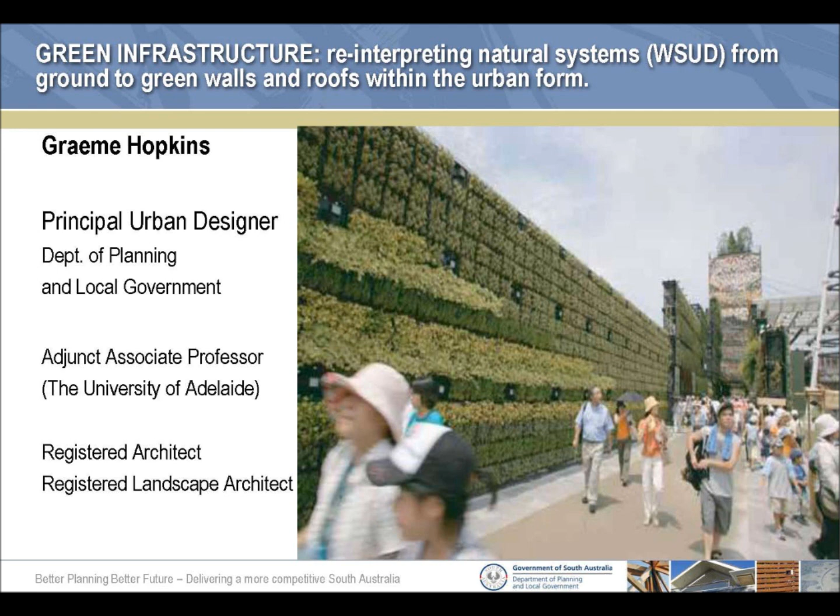I'll be looking at some of the natural systems, not all of them, and briefly talking about some of the things we're doing at planning, which is quite interesting work, and how we can build up density in the city and maintain our open space.

First of all, a city is an ecosystem. I'm not a scientist, so I have a very simple definition: an ecosystem is a community of living things interacting with non-living things. I understand that, and I think that's a really simple way to look at it.

These systems are considered open systems, as both energy and matter are transferred in and out, resulting in change and evolution over time. That last phrase is really important nowadays, as our ecosystems and weather patterns are changing. Normally this has happened over a long period of time, but now it's speeding up, and we have to get in and work with that quickly.

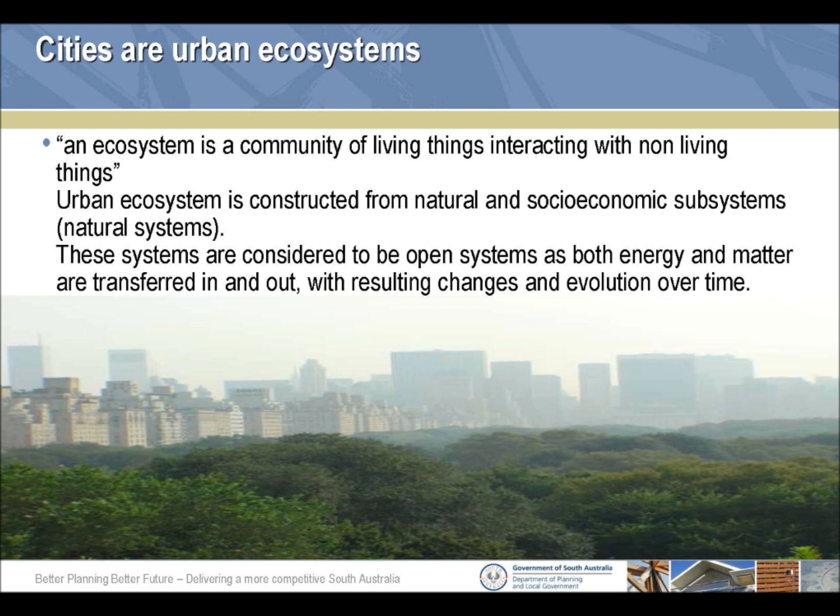So that's one premise. I work on two premises: a city is an ecosystem, and the other is that a city is a water catchment storage area.

What I'm saying is, if you look at a natural system, you get about 20% runoff of water, or 20% base load of water from the ground, and 27% runoff, like Kangaroo Creek Dam, so you get about 40% of the rain caught in that dam, if they're not topping it up from the River Murray.

But in a built environment, when you look at the city, your base flow is only 5% because there's very little infiltration, but your surface runoff is 58%. When you put those figures together, the city makes a lot more sense—you've got 63% catchment compared to 47%.

So if we're using these hard surfaces, water runs off—you don't lose it. But the trick is how do we store the water within the city so we can reuse it? There are things like roofs, vertical walls, storing water in the road pavement, so we can recover that. So those are the two premises I'm working on.

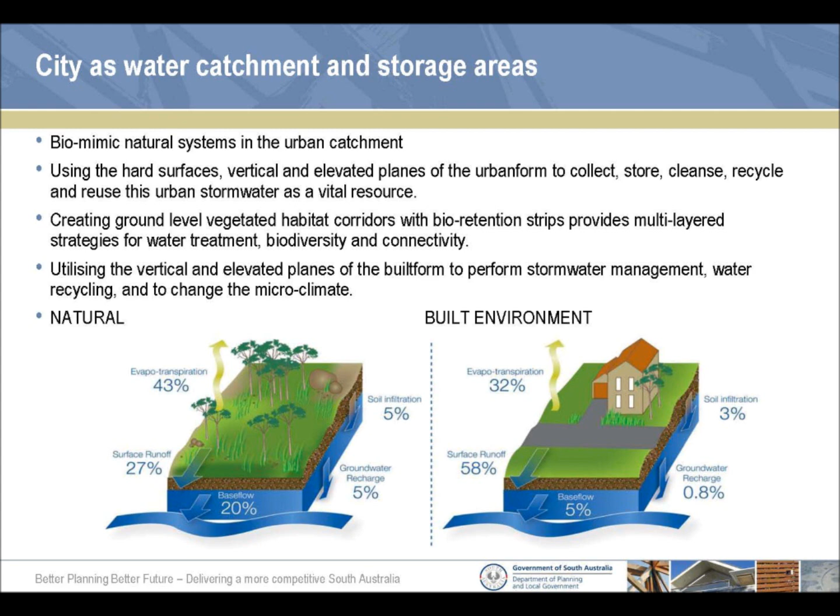This falls into what I call green infrastructure, a common term happening around the world now, and I'm introducing this to government, which is an interesting process in itself. Green infrastructure, as I see it, is using natural systems in the urban environment to replace existing infrastructure, such as here's an example looking at water.

Our cities can't replace the infrastructure—it's too expensive. So we need to find ways of doing that naturally, and at the same time enhancing the built environment around us. We can augment this, and it can be a great cost benefit to the state or the city.

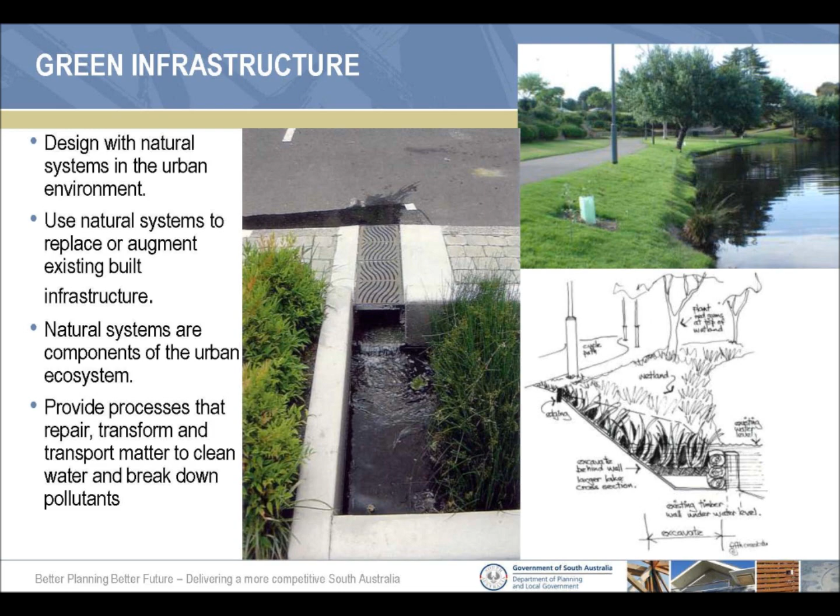The rainfall in Adelaide is going to be quite different to the way it is now—we're starting to get the effects. We're going to have about the same amount of rainfall, give or take whatever scientists you believe, but the way the rain comes is going to be in bigger, more intense amounts.

In the top diagram, the blue water is the rainfall and runoff we normally get on our paved areas. What's going to happen is we'll get that rainfall in bigger loads, so the purple on top becomes the water volume—those pavements are catching a lot more water.

If we don't improve the infrastructure to take that water away, we'll have nuisance flooding. So there are real issues in the built environment. Things like Rundle Mall will get a lot more water on its surface, and the infrastructure there won't cope. We'll get wet feet walking down there, and in an extreme case it might go into the shops.

So what we're looking at is the bottom diagram, where we reduce the catchment—the paving area. With that intense rainfall, we have a smaller, more like current runoff, but we put it into the ground, into biofiltration strips. We let the water clean through these systems and soak in, more like the photographs from work that Taylor Cullity did in Melbourne—that style.

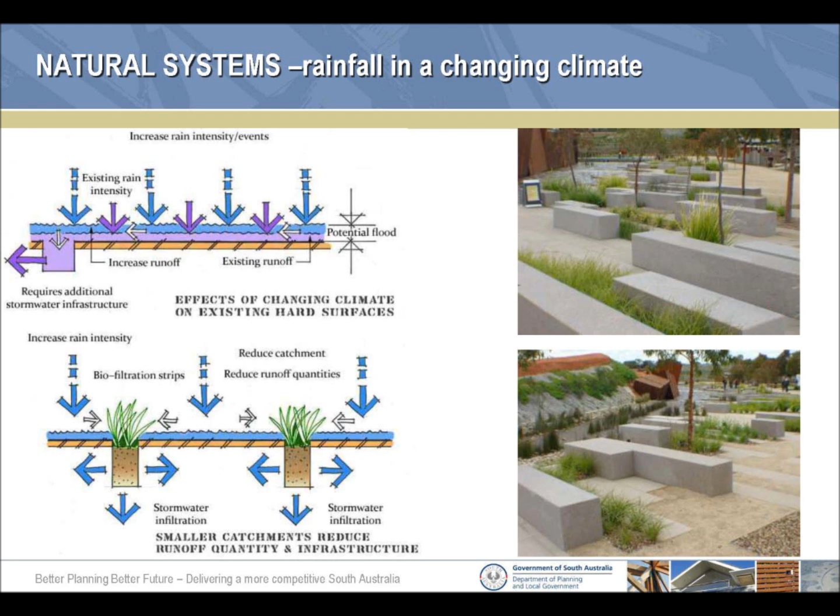So that's sort of looking at rain. Other things we're looking at is how you use trees. Trees are a natural system. They're a heat pump. There's air circulation around a tree within its canopy from its transpiration. There's water, different humidity levels and air pressure. So you get a natural circulation.

This is some work being done, was in America, was for Dubai. Whether it's been built now with the financial crisis, it might be another story, where they're building giant artificial trees, where you actually bring in the hot air. The hot air might be up there 40 degrees. You actually spray mist water, which then reduces the air temperature. You get a change in air pressure, and you can bring the cold air down through a downdraft chimney effect to bring a temperature back into the mid-20s at the ground.

Singapore are looking at this in their new parkland developments on their waterfront, and they're looking at these artificial trees that are 7 stories high. Taking that sort of, again, that's a really old technique. If you remember back, people of my vintage, of the old Parliament House in Canberra, there was the Senate and House of Representatives courtyards. They had major trees in the middle, and they were designed to pump out the hot air. And if you look at the Treasury building, it did have big scale trees to do it. It's a very old technique.

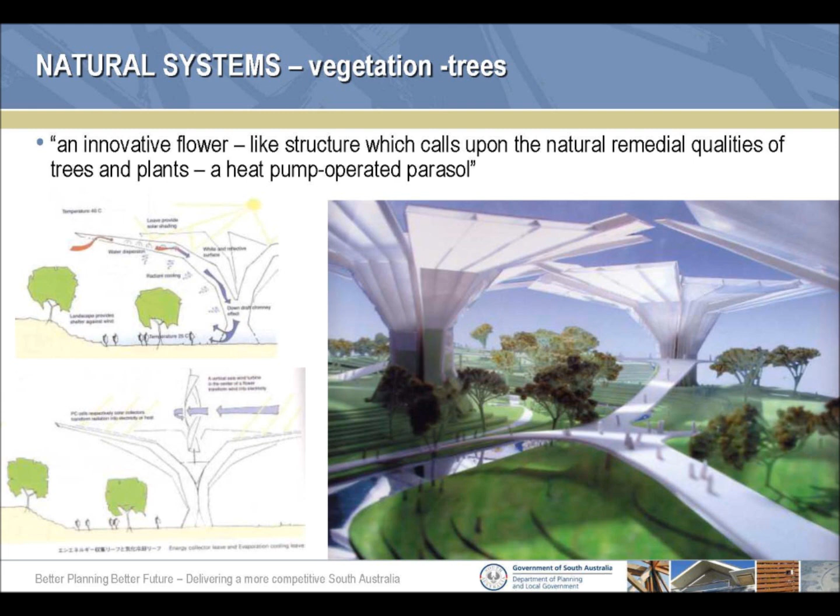Taking that principle, we can look at places like Rundle Mall and outside malls. They're going to become really less populated as the temperatures rise, as people worry about skin cancer. People are going to move to the internal malls, which have other social problems because they're private land and they can exclude different population groups or whatever. And because they're going to be air conditioned and comfortable.

But if you look at the mall, take that shade structure there, I quickly just did in principle what you could do. You can collect the water on the roof, take it down, store it under the paving there, put solar panels, stick onto the glass. That will pump the water back up, mist it out, and then you start to get your air temperature changes and use the downdraft chimney effect to bring cold air and air condition these malls. Therefore, if you had a series of these, the actual temperature would be reduced, you could attract people back, and there's an economic advantage then back to those businesses.

So we've got to look at how we handle the public realm, and it's going to be quite different to how we're doing it now.

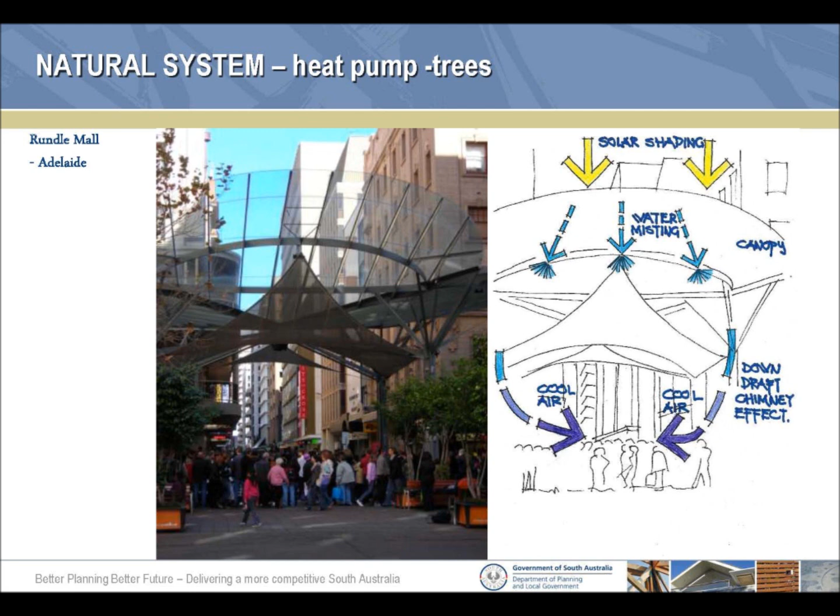And if you take these natural systems and you actually integrate these natural systems, they will then start integrating with each other. You can actually treat pollutants and stormwater runoffs and so on.

This is a very quick conceptual sketch of a project we're working on at the University of South Australia. We've just got some grant monies to start the preliminary design work where we're looking at treating water, storing it under the road pavement within the airspace of the gravels, using street trees for shade effect, reducing the heat island effect off the pavement, using cool pavements, and then recirculating that water back into the buildings, into new buildings as reuse water.

We also start looking at using green walls and green roofs. Green roofs are extremely important for stormwater retention and so on, and green walls are very similar, but we can use those green walls to cool the sun on the walls surrounding this laneway.

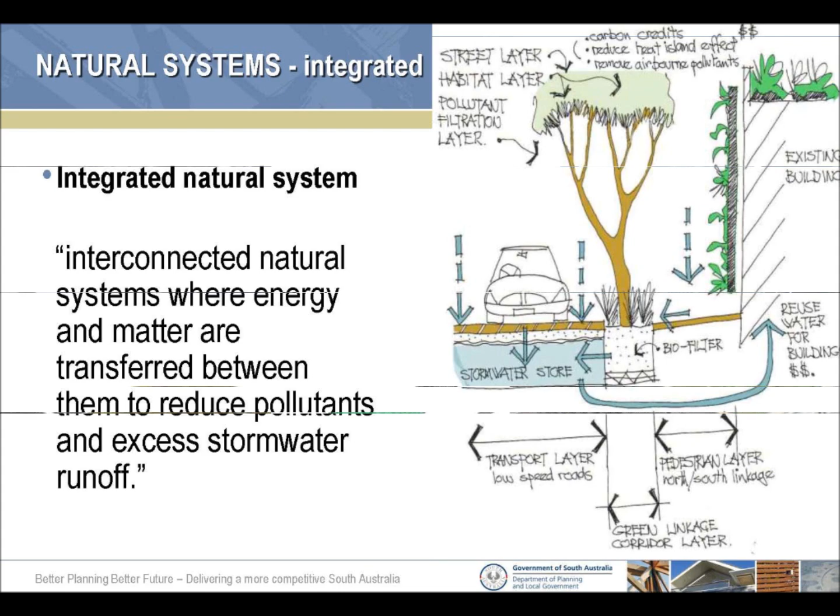And that brings me to where my interests are even more developed, is looking at green roofs and walls. Green roofs, you can use them as urban forms. You can do any shape you like, anything nowadays, because the technology's there. These dome roofs are the California Academy of Sciences, where they've actually used the actual topography to cool air and bring that down into the building to air condition the building. So there's lots of benefits.

We can increase shade and insulation, reduce energy costs, and in multi-storey buildings we only have to reduce the amount of energy by a minute amount to get major cost savings.

As Stefan said, the sides of a tower are exposed, but on a tower like the Chicago City Hall, you just shade the top, and that has an effect for only the first few floors. So to me, we really need to look at the walls to have greater benefits.

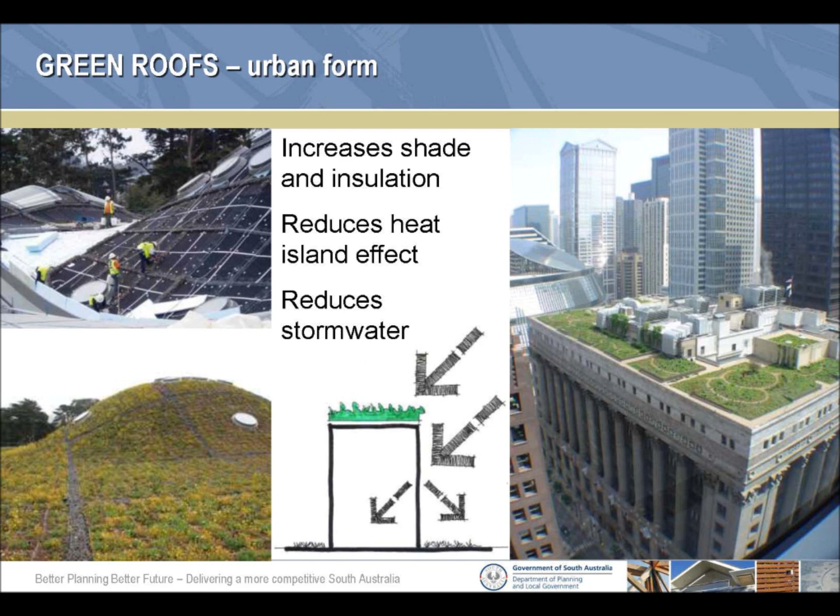But just looking at natural systems, we can use on rooftops the natural cooling effect of plants to cool the ambient temperature around photovoltaic cells. They can actually work up to 20% more efficient than on a conventional roof. This was a 5-year study by German scientists who have done this work. If we can get 20% efficiency in a new photovoltaic cell, the commercial world would take that up and say this is a great benefit. We can do this with a green roof, and we have lots of other benefits.

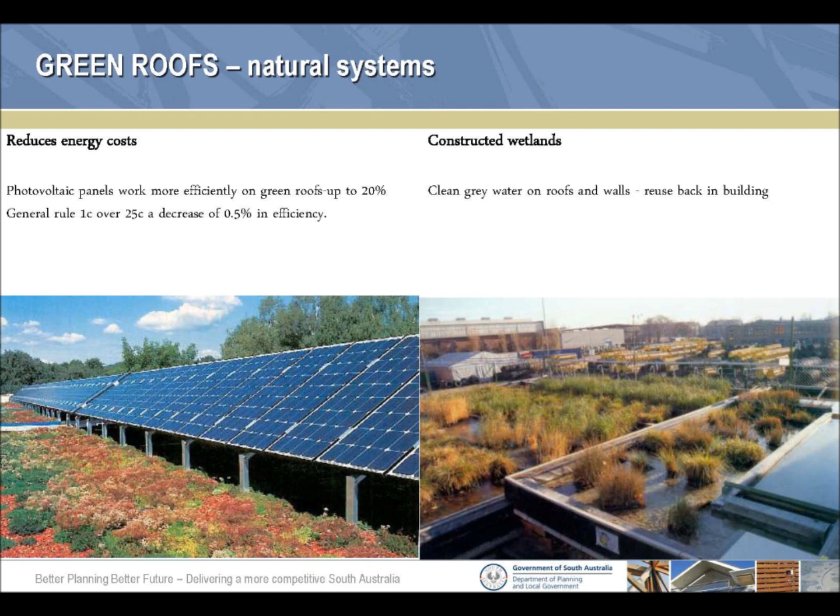We can actually put constructed wetlands up on roofs, and this example here is a John Deere factory in Germany, where they take the water out of the production line, bring it up to the roof, cool it, treat it, and then reuse it back into the production line. So the technology's there. We can have a lot of our wetlands on top of building roofs instead of taking up ground space, which can be used for other functions. In a compact city, ground space is critical. If we can use the building fabric to do the same jobs, then that's what we're doing.

If we look at living walls, they give us urban texture to the streetscape and the form. But I think they have a big benefit to the energy use of the building, because if it's a multi-storey building, you've got a lot more surface area you can treat. Technically, it's a bit more difficult, but not impossible, and with the new systems being developed, the cost is coming down. They've got similar benefits, reducing the heat island effect, and so on.

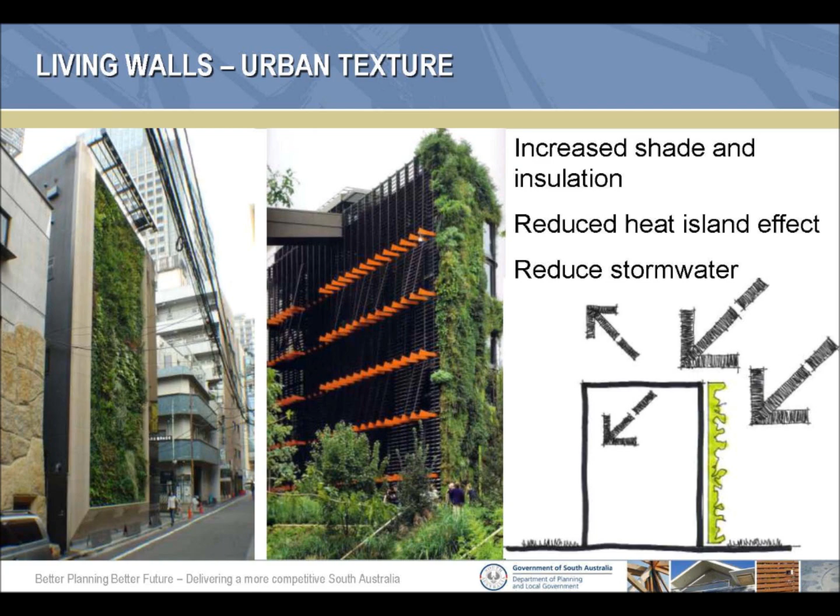But if you look at the living walls as natural systems, you can actually look at a multi-storey building - that's a section here on the right - where you can use the living wall as a biofiltration system. You can take the grey water out of that floor, run it through the system, and then bring reuse clean water back into the next floor and so on. So you get this cascade effect happening right down the building. This technology is available. We can do it now.

And on the left is a vertical wall with a fish pond at the bottom. This is in Toronto, at the Canada Life Insurance Company, where the water from the fish pond area is recirculated up to the top of the living wall. It then cascades down through the living wall. The fertilisers or nutrients come out of the water, and the plants use that as their fertiliser. The water comes back down to the fish pond clean, and it's just a constant cycle going on.

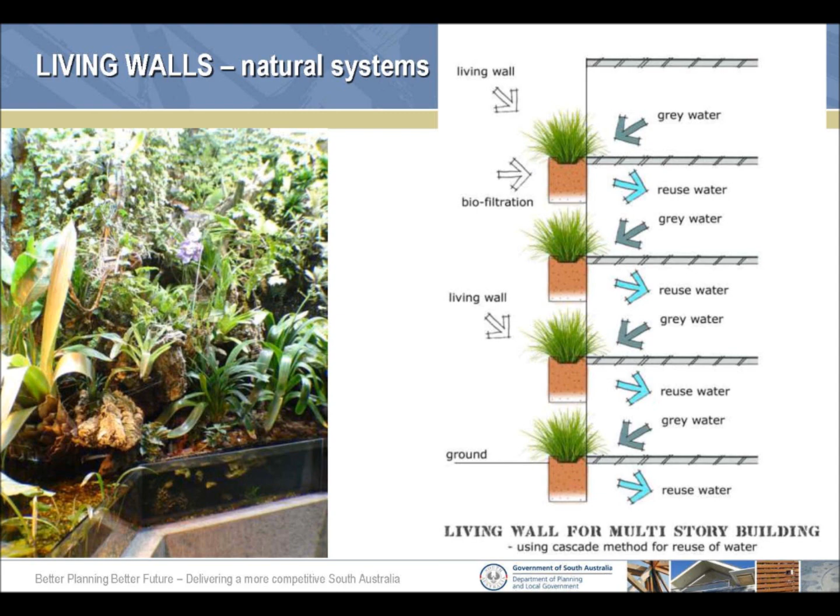So we can actually look at these ecological principles to look at our building facades, and we can do this if we really want to.

If we put those two together, we get this ground-roof connection, and this is where I see a great opportunity for Adelaide. This building's in Fukuoka in Japan - quite a famous building, stepped there. But if we had building envelopes and control around our city squares, with buildings that step back with greenery, those city squares would have 4 to 6 times more biomass, and the cooling effect of that would have an enormous effect on the city itself. We've got 4 major squares and so on, so there's really interesting urban forms to look at here.

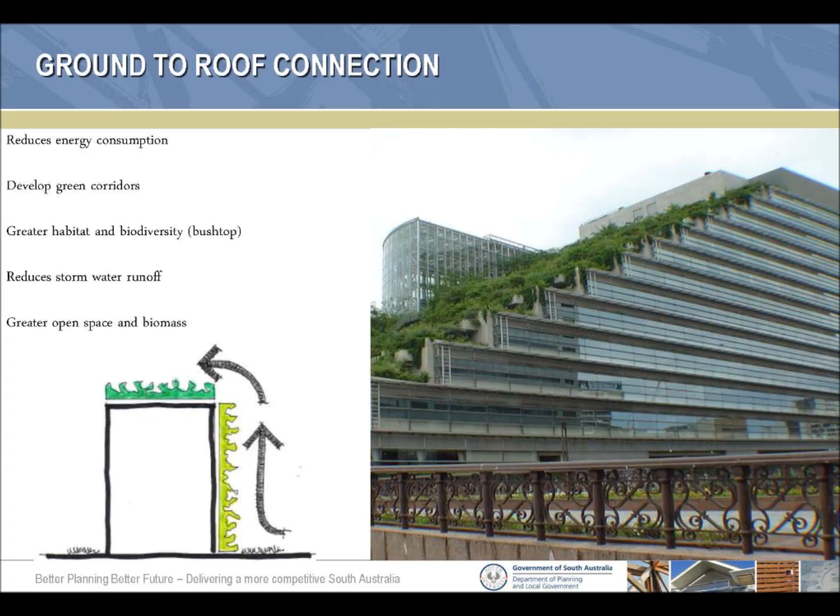If we look at these living walls and roofs and green roofs and say they're bush tops - ecological habitats - and then say, well, they're the habitats of what was originally here, this is what I call a bush top. It's basically looking at what was here in the CBD before we converted it, and we put that on our walls and on our roofs. We can actually start getting a mosaic of a pattern running through the city.

The city had migration patterns for insects and birds through it before we built it. So my work is to look at them and to actually set up these stepping stone corridors so we can get those migration patterns happening again. I'm using a metapopulation theory developed by Paul Ehrlich back in the 70s. This has been developed in California at the moment.

It's the only other place in the world where I know we're working on the same sort of principle, where you don't have to have a corridor that's constantly connected, as long as the distance between the roofs or the habitats are within the migration or flying distance of your targeted species, then they will move along and colonise these areas.

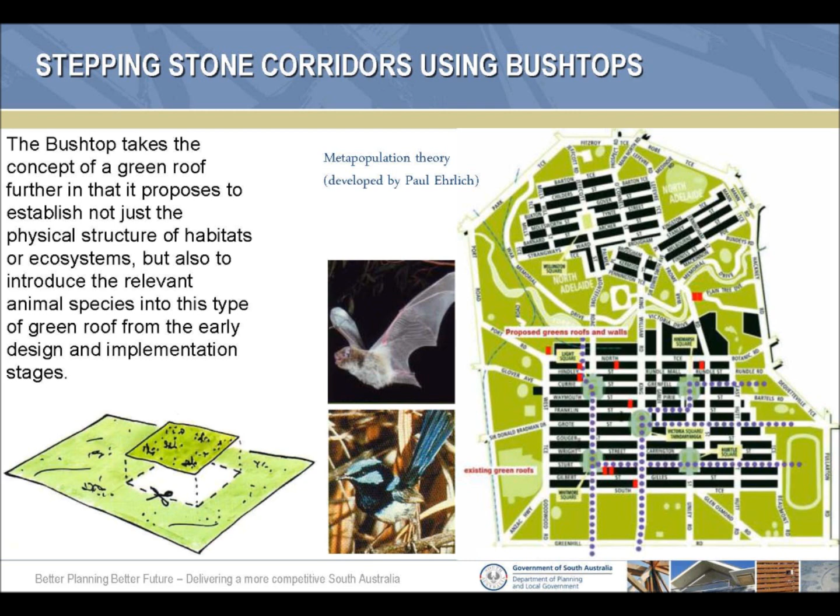We get 25% more biomass open space than we started with pre-development. If we use roofs and walls, we can get an enormous amount of biospace. The only downside is we don't have a lot of deep-rooted zones, but if we do careful design, we can address that.

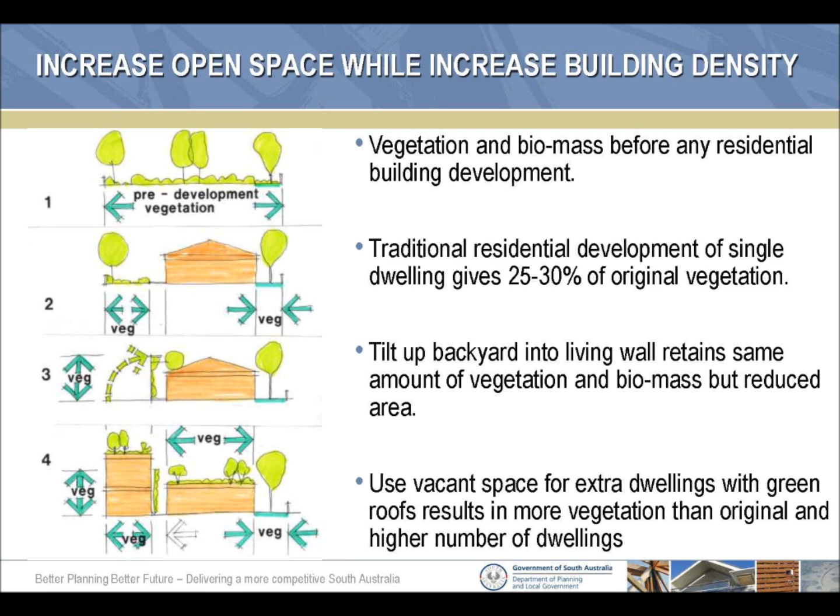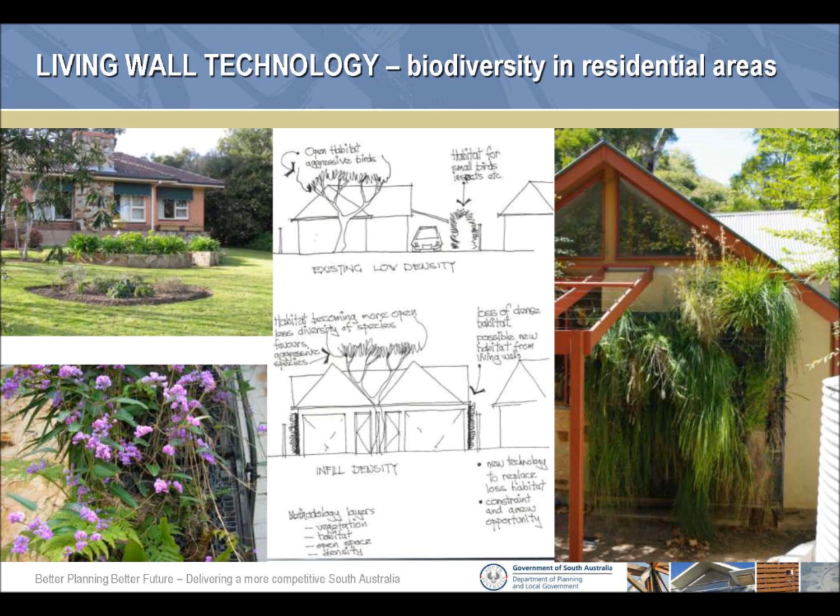They harbour in that hedge. When we redevelop, we put 2 houses on the site where there was 1, and that hedge is the first thing to go, so that habitat disappears. What we're saying is this green wall, living wall technology could be put on the house or on the fence to recreate that habitat. We can increase that density while we maintain the urban habitat, and that's a really important factor.

And we take that one step further. We look at really dense, more TOD-type developments where we can put green roofs, living walls, green balconies, and parklands within the city, forming this three-dimensional open space system.

This is really what I'm working towards in the Department of Planning, to get this three-dimensional open space system, because we're used to a two-dimensional everything on the ground, but to get density and to get more open space, that's what we're up to.

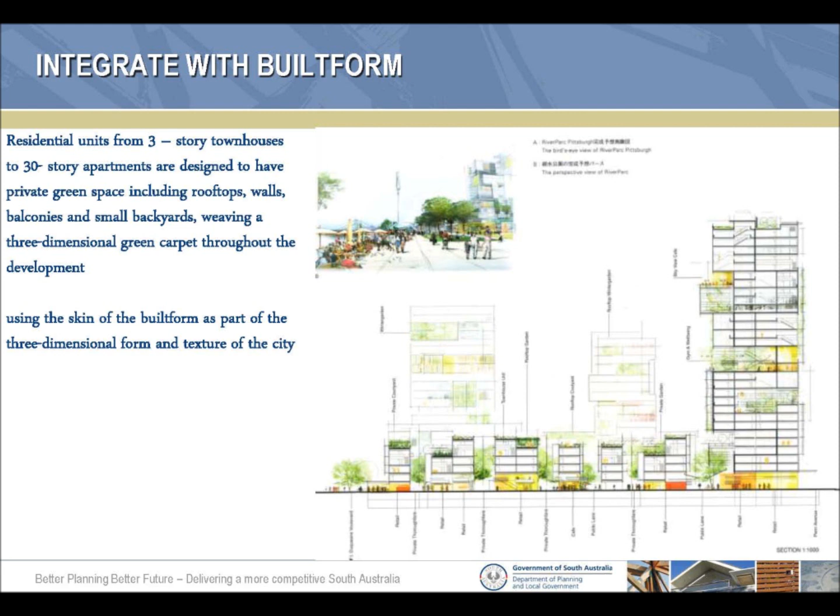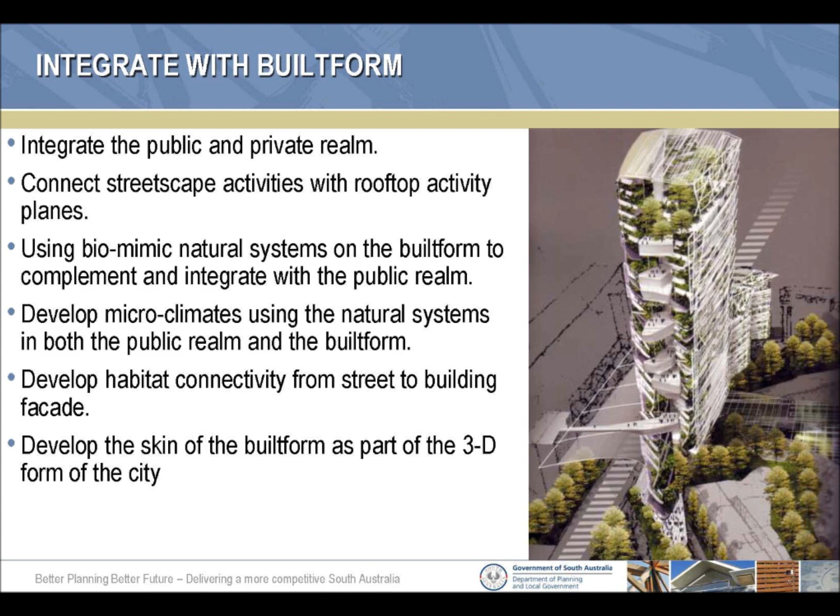Buildings should be more - this is a Ken Yeang building, as people would recognise - but we need to integrate the public streetscape with the building facade and the building and the rooftop and put it all together. We're looking at things like the heat island effect and the cooling effect of the city.

We started a research program so that we can actually get enough information together in the next 12 months to 2 years to actually start building envelopes where we can target putting green onto the building in strategic places to absorb the heat or cool the area.

And there's a secondary one, the carbon dioxide dome that's sitting over the cities - we can reduce that through vegetation.

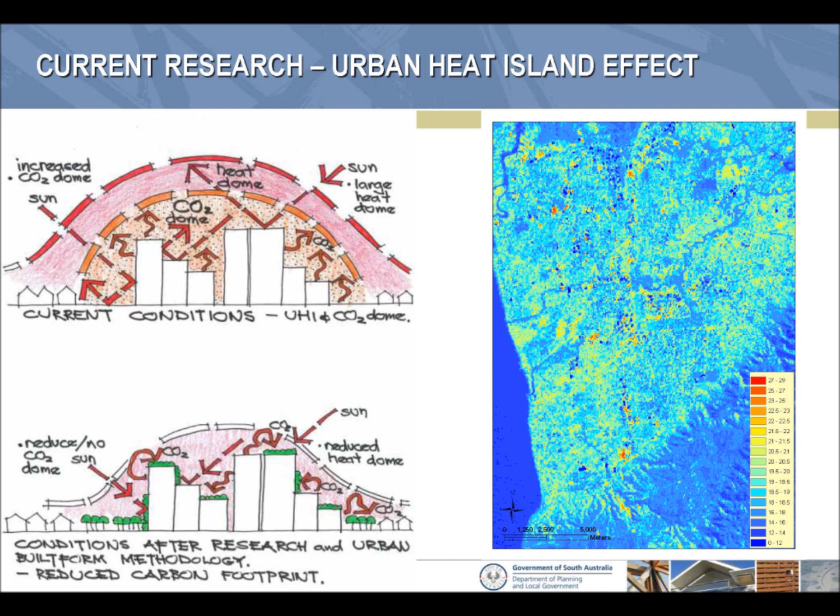And when you think about it commercially, there's a big area of rentable space for the building owner that doesn't even consider it. But we're looking at it and we've broken it down into 4 elements.

The environmental element, to look at adapting to climate change, our bush tops, our habitat process. The lifestyle residential rooftops, where in buildings we've got a lot more green space within the living areas of residential complexes. The business case area, or the commercial rooftop, where we can have deck chair theatres.

We can have child minding centres on top of car parks with green roof playgrounds, where people can drive if they've got to drive to the city, drop off their child there, even come back at lunchtime if they wanted, and then come back and pick up their child and go off. The 4th is what Stefan was talking about right at the end, and I agree with him, is the food production.

If we can grow plants on a roof or a wall, they can be edible plants, so we can have production on roofs, walls and so on. This reduces the food miles, but there's a commercial element to complement the actual environmental issues, and these are the things we're looking at in planning. Thank you.